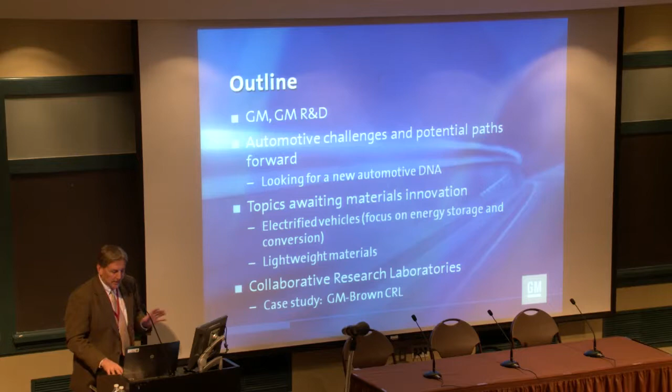In my own particular case, I've dealt a lot in my research with both lightweight materials and energy storage solutions. I'm going to focus on those for today, and I think those are actually critical growth areas for the automotive industry as well. I'd like to then close with the Brown General Motors Collaborative Research Laboratory.

Real quick with regard to General Motors, it goes back to the turn of the century. 2011 was about a 5% return on sales year for a $160 billion, $150 billion business, and it employs about 200,000 people.

The history of GM R&D - it's one of the first, actually, automotive research laboratories. It used to be more or less centralized in Michigan, and now it's very much a global network. You can see that here in terms of the overall makeup of our R&D network. And the Collaborative Research Laboratories is a big part of that.

One of the things I would tend to say is automotive is an extremely competitive business. In the best of times, the best companies are making about 5% return on sales, yet you're talking about structural costs and revenues that are well over 100 billion. So if there's a downturn in the economy, it gets tense. For that reason, it's been considered to be a very tough company to be in.

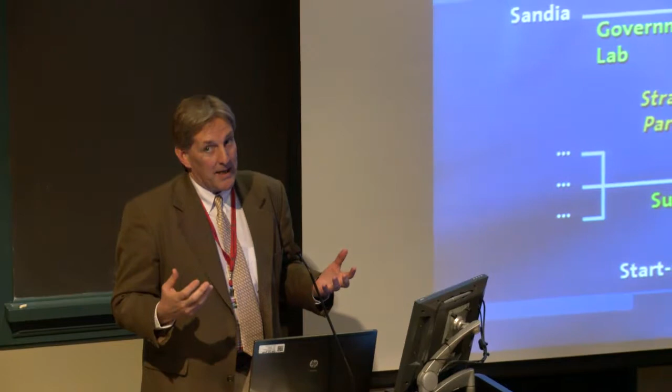One way I look at that, as far as how to get research done, is you have a bit of a junkyard dog mentality. You're willing to collaborate with anybody, and it's just a lot faster way to get work done and get research done. So at any rate, with that in mind, some of the brief history going back to the start of the vehicle.

The reason this slide is useful to me is, why do cars look like they do today? That is actually a profound question, because you'll see, if I get a chance to show the movie at the end, I'm not sure cars are going to look like that in the future. In some sense, you can trace it back to the horse and buggy. And the LaSalle coming out in about 1927 is often viewed as one of the first modern day vehicles.

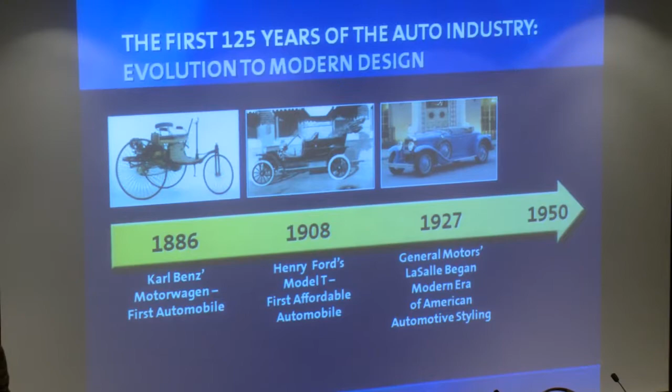So you want to buy a vehicle, typically if you're in the United States, you want one that has 4 to 5 passenger capability, and it has all the attributes you'd want out of a vehicle today. If you trace yourself back to the 1950s, you see that same basic attribute, and styling was king at that point in time. You had model years coming out that tended to rule the day, and the models were fairly differentiated. However, there were about 200,000 to 300,000 units per model, and that's important—I'll come back to that.

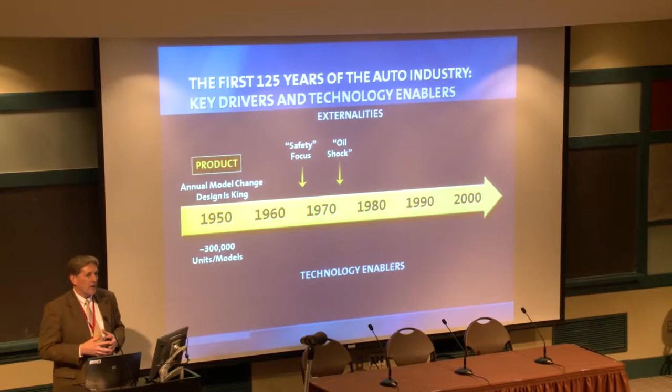So advancing from there, we had two relatively large shocks that changed the industry. One was a safety focus, which now manifests in airbags and extremely safe vehicles. Then there's the oil shock in the 1970s—a lot of folks here won't remember that. I can remember having to park our car at the gas station in line, walk down there, and your dad gave you about 25 cents to fill up the car for him, and he'd come pick it up later. But at any rate, the progress has been fairly profound since that time.

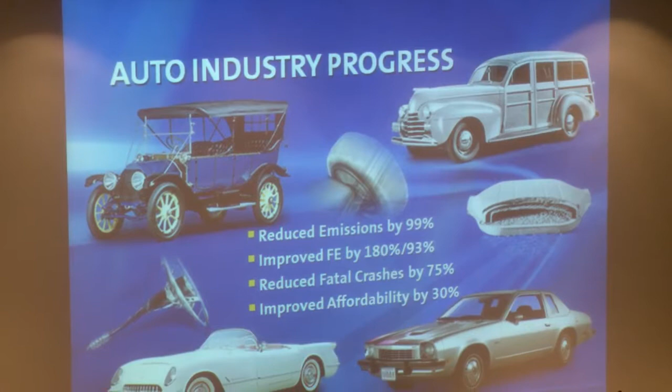There are greatly reduced emissions, and this is important—I'll touch on it here and probably won't mention it again—but there's this extended range electric vehicle concept. The Chevy Volt has that embodiment. One thing to keep in mind is that the emissions between cities, when you'd drive the internal combustion engine because you got about 40 miles of electric range in that vehicle, is pretty much negligible. It's hard to measure some of the regulated emissions at this point, which tends to set the regulations. So they're extremely clean, especially after they've gone through light-off and are driving on the highway.

One of the problems we had in the 1980s and 1990s is we got very good at making these 200,000 to 300,000 unit vehicles, but we badged them differently, and they all looked kind of the same. So you tended to get a more boring styling approach. Then coming up to the year 2000, there was a lot of emphasis on fuel efficiency and hybridization, which I'm going to talk about—electrification of the vehicle. The other thing that happened was this pervasive styling change. Now it's very common to have about 50,000 units per model. That places a great deal of emphasis on agility in manufacturing.

When you have forming processes, you want to be able to use the same die and presses—you can't replicate these things. A body shop costs about $1 billion in an automotive assembly plant, so you've got to be able to stamp all these different parts. You have to have quick change of tools, and you have to have very robust simulation codes so you know how to do stamping without problems related to agility and making different parts.

Now coming onto the next part of the talk, which I think is quite important, is some of the automotive needs. One of the most important things to keep in mind, because you're going to see it pervasive, is sustainability. That's probably going to be one of the biggest things we face. We don't really see it right now—you don't see it, you don't feel it—but it's probably going to be out there quite soon for us.

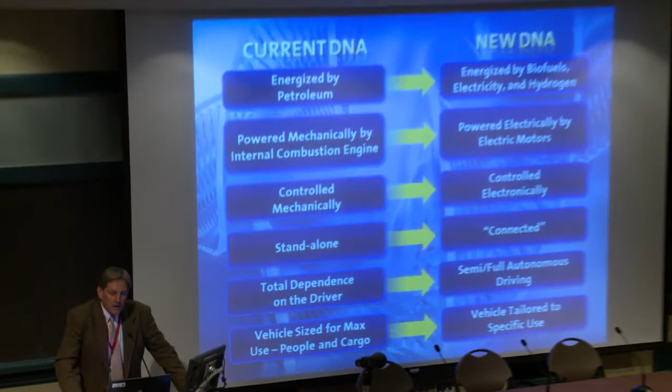So this is why I was going to this current DNA and new DNA in the talk. The current DNA, we're energized by petroleum. Likely that's going to have to change.

We've already had people—and I don't have enough time to show all the slides here—but people from oil companies, the first time about 5 years ago, said we're past the point where our known reserves can supply all of the known demands. So there's a gap at that point. People thought that tipping point would be a rather dramatic change for energy security. In some sense it is, but for the most part, people don't think about that every day.

But we're going to see much more reliance on alternative fuels in the future. In the past, we were powered mechanically. As you go to more electrified vehicles, you'll have other power sources come on and other couplings or transmissions—electric coupling, if you will.

The next thing is standalone. I'm going to show on the next slide connected vehicles, but one of the things we need to address, in particular congestion—which is a large problem with our emissions as well—is vehicles got to talk to each other. And the other thing, what's even harder, vehicles got to talk to the infrastructure.

The real question to ask is, will vehicles at one point in time be safer driven by just the vehicle than for the owner driving the vehicle? There was a DARPA Urban Challenge. GM entered that with Carnegie Mellon, and we had the winning vehicle—it was a Tahoe, and it looked like all kinds of claptrap around the vehicle with all kinds of sensors and LiDAR and everything else, but it could drive a course.

And the course was kind of funny. They had even changed the course from the original map, so the vehicle still had to drive it when a stop sign was one place and now is no longer there. And the vehicles can do that. We can do that today. They're incredibly expensive, and they're a bit slow, but nonetheless, you can actually drive autonomously today. That isn't a question.

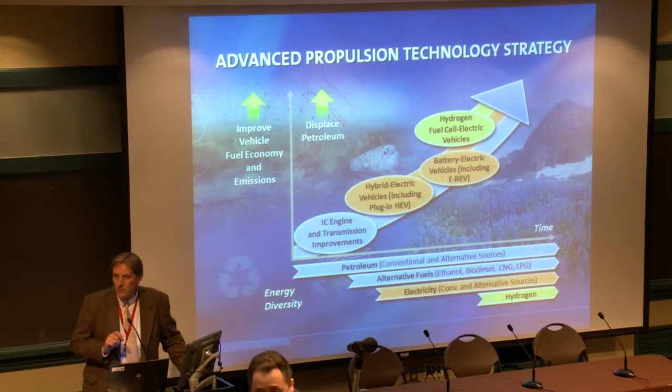At any rate, with regard to conventional vehicles today that you see on the road, we have two types available, and I'll make a brief comparison of the two right now that might be solutions to our immediate future energy challenges. The Volt is one of them, well known by most. The general architecture of the vehicle is shown here.

It has this attribute of having about 35 miles in cold weather, about 45 in hot weather as far as miles you can drive electrically. No matter what you do during that time, it will drive electrically, even if you put your accelerator pedal to the floor. That differentiates it from a plug-in hybrid, which is not a full-function EV before it drives out its battery pack state of charge. Once you drive off that 35 to 40 miles, the vehicle will act like a charge-sustaining hybrid, much like a conventional hybrid.

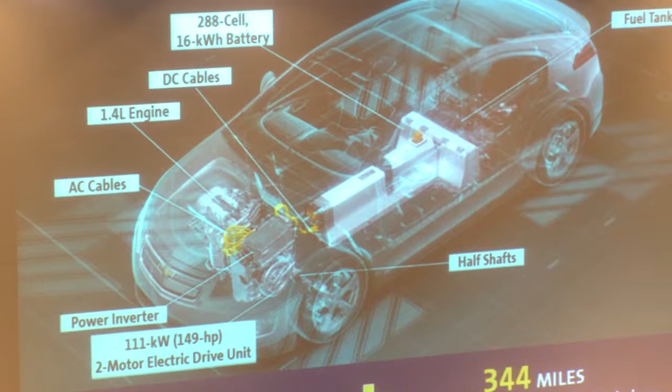It has still a fairly large battery because a lot of reserve is left, about 25% of the pack capacity. It's a 16 kilowatt-hour pack, and so the combined range is somewhere near 400 miles, depending on how it's actually driven.

So we've announced, and I don't know, let's see if Tony's still here. Tony, I actually put A123 on my slide. You didn't put GM on your slide. It was one of the collaborators.

But anyway, we've announced that A123 will be supplying the battery pack for our small battery electric vehicle that's coming out, shown here. It's off of our Chevy Spark platform, much like the Chevy Volt is off of the Chevy Cruze platform. Some different electrode materials are shown here, and I won't dwell on this more other than to say there's a lot of work to be done in that area to reduce cost and improve performance of electrode materials.

So now, if the batteries don't go far enough in terms of reducing cost, particularly for a pure electric vehicle, where batteries are very expensive, the question arises: will fuel cell costs come down? Because at the end of the day, what's really important to consider is that the only vehicle that can provide zero emissions off the vehicle, not off the grid—you can have some emissions where you generate your energy, but on the vehicle, 350 miles of range, and approximately a 3-minute fueling time, much like we have today. There's only one vehicle type that we know that can do that, and that's a fuel cell.

Of course, the problem is fuel cells are extremely expensive. So cost reduction and infrastructure deployment, which will likely follow the cost reduction, would be the two most pressing concerns there. Some of the remaining challenges are shown here.

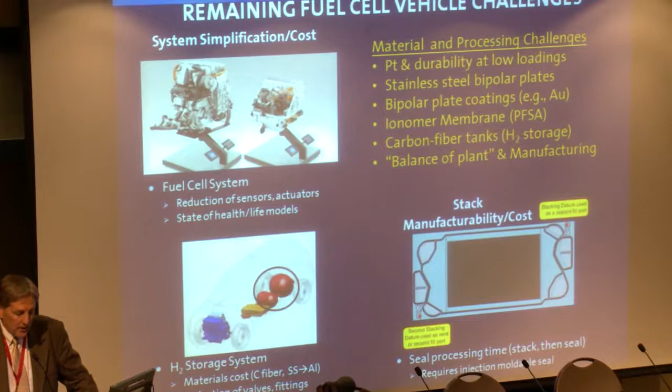Actually, the balance of plant is very expensive in a fuel cell. You've got a lot of things running, pumps and everything else that make the critter go. The hydrogen storage system, people often forget, is very expensive. We did a fair amount of work ourselves on solid-state hydrogen storage, and there's a lot of interesting material science there, but it just looks extremely difficult to ever store as much hydrogen in a solid-state material as you can get by very, very high pressure carbon fiber tanks, and that's really what's used today, but they're very expensive. Carbon fiber isn't used pervasively as a structural material because it is so expensive, so you're more or less pushing that expense back onto the fuel tank in that particular case.

There's an analogous problem with natural gas tanks as well. And then last, some of the other things you might not think about: it turns out bipolar plates are very expensive. They're made out of stainless steel. You can kind of think of a John DeLorean fuel cell engine—it's a whole lot of stainless steel that goes in there. People are looking at ferritic, low-cost stainless steels for that purpose.

But the corrosion environment is very tough. You've got hot oxygen, it's moist, and it's on the oxygen cathode, and that's a very corrosive environment. And then some of the things like seal processing and welding—actually, the longest line length of welding that GM has probably ever done would be in the fuel cell bipolar plate joining.

So these are enormous challenges to get the stack-up fit and architecture correct for eventual widespread application.

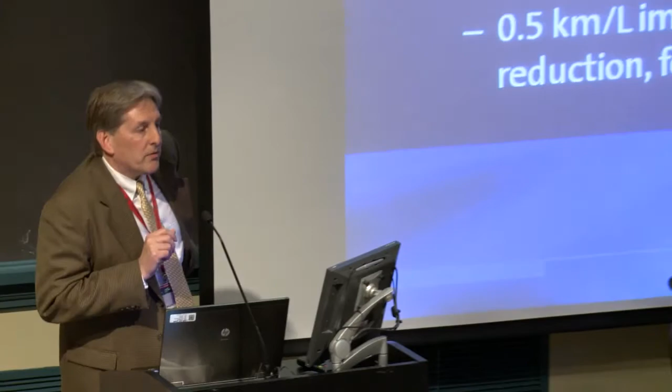The next thing I'd like to talk about briefly is vehicle light weighting. You get about a 6% improvement in fuel economy for every 10% decrease in mass. Some of the other ways you can look at this are listed there, but it's a significant lever to pull in terms of trying to reduce fuel consumption.

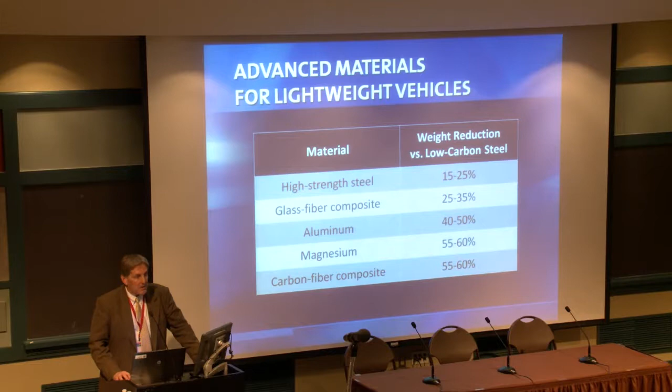If you look at this table, you can see some of the materials and the approximate reduction you can have relative to low carbon steel. These are somewhat usage dependent—are you talking extrusions or castings or what have you? But the approximation is shown there, and the basic point is most of our car today is made out of low carbon steel, and there's an opportunity to reduce mass. The obvious problem is that these materials tend to cost more. They're typically looked at as high value materials in automotive.

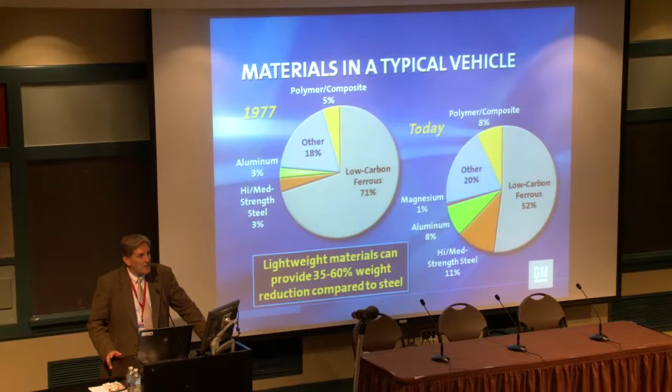If you look at material trends over the past 20 to 30 years, you can see that we had a lot more low carbon steels in the past, and now we're moving more into polymer composites, about nearly 10% of the vehicle. It's mostly thermoplastic olefins and other plastics used as closeouts and fascias. Aluminum is about 10% on a vehicle as well, primarily in the cast engines.

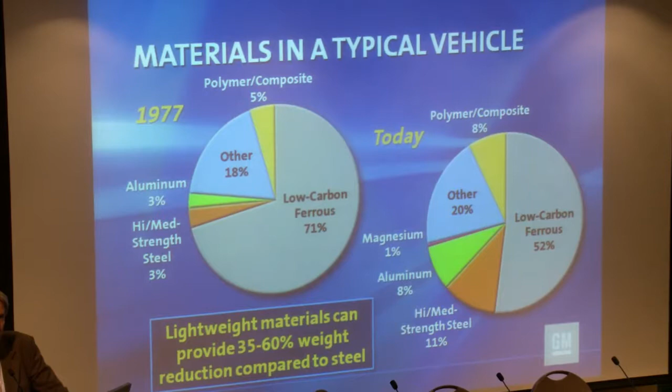Nowadays, because of the way vehicle architectures are set up, you have most of your mass over the front where the engine is, so you want to lightweight there, otherwise you have a front-heavy vehicle. So you pay a premium to lightweight up near the front. Likewise, you try to lightweight at the top of the vehicle and your unsprung mass. But aluminum has made it in there for the cast engine parts in particular—you see very few new engines coming out that aren't cast in aluminum. The question will be, can magnesium be made strong enough in terms of creep strength and corrosion resistance to replace aluminum in the future?

The Corvette is sort of a poster child in our case for lightweighting, for a different reason than fuel economy—it has to do with about 3.5 seconds for 0 to 60. For rotating parts, titanium is often used so as not to limit horsepower on those systems. Magnesium is near the top of the vehicle for the magnesium roof shown there. And then there's a carbon fiber floor pan—actually, there's a balsa floor pan that we have in other systems as well.

The Corvette's structure is actually unique to the industry. It has these frame rails that run from front to back, and they're pinned by the bumpers—it's the only vehicle designed like that. Through the center section is a stamped aluminum part that binds the two frame rails together. So the longest frame rails in the industry are actually on the Corvette, the longest hydroformed frame rails. There's a project we've done through USAMP.

One of the things we've come to realize is that nature has given us a whole bunch of materials, so you want to put the right material at the right place. You can think of not just topology optimization for load paths, which we've all done for many years and is still a very complicated subject, but also materials optimization at the same time. Ideally, you want to couple materials optimization and topology optimization.

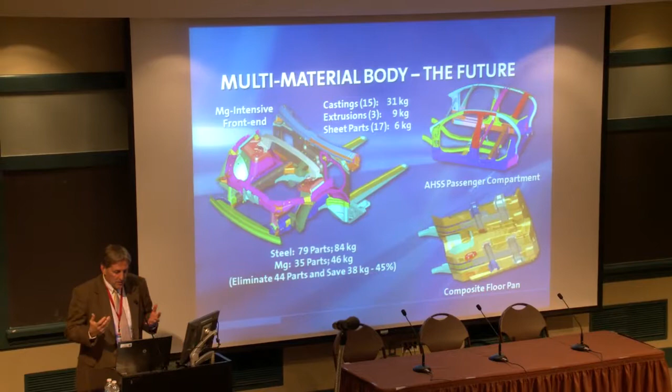So here you can see an advanced high-strength steel passenger compartment that tends to protect the passenger. Then you have front A-pillar forward, so that front engine compartment region is dominantly magnesium. And the floor pan, because of its large flat surface and fairly massive nature, is a composite floor pan, which tends to make for a more optimized vehicle system.

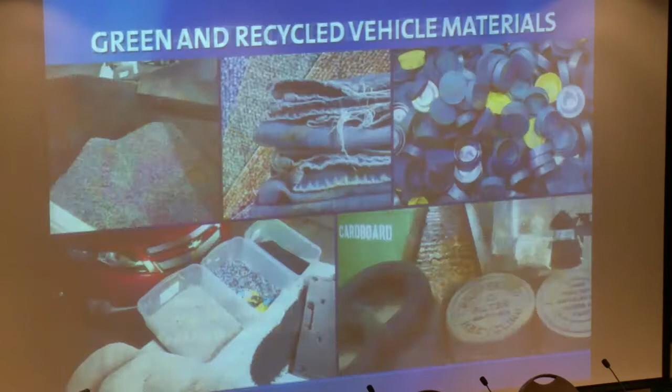I won't say more about it other than to say recycling is a big part of the automotive industry today. It has been in the past, but it gets a whole lot of attention now, as it should. So we strive very much to have recyclable parts in all systems.

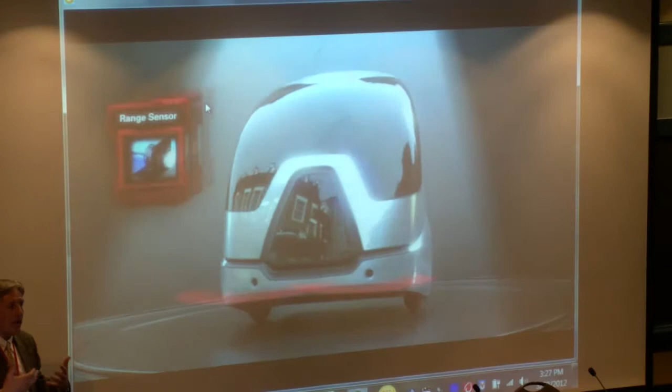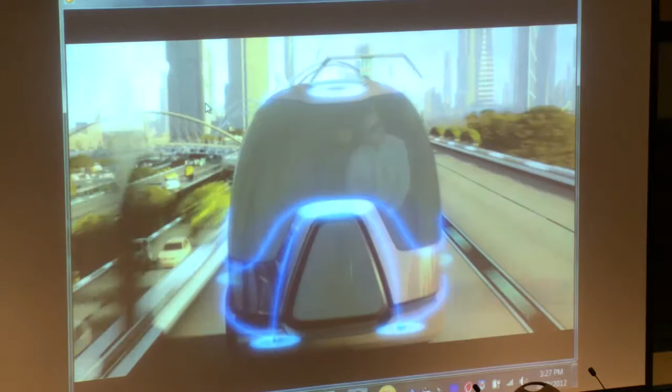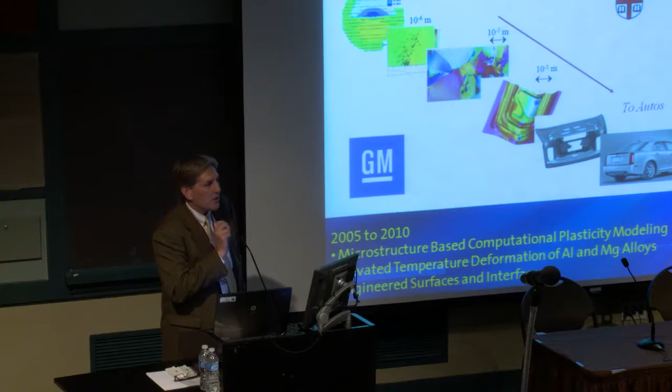We have a saying we often use: atoms to autos. The basic notion is to go from calculations that are rather basic in nature—from say density functional theory to atomistics—and then work your way up through maybe single crystal plasticity, finite element calculations, and into vehicle parts. We have a couple examples I'm not going to talk about precisely today, but we've actually done that exchange of length scales.

Now, I don't mean to say that the code we run in automotive for design—that's LS-Dyna in GM's case, others use ABAQUS or other finite element solvers—we don't put atomistics into those codes. But we can inform our constitutive relations used in those codes by what we learn from some of these smaller length scale endeavors. That's where the linkage comes in, and it becomes very concrete in many examples.

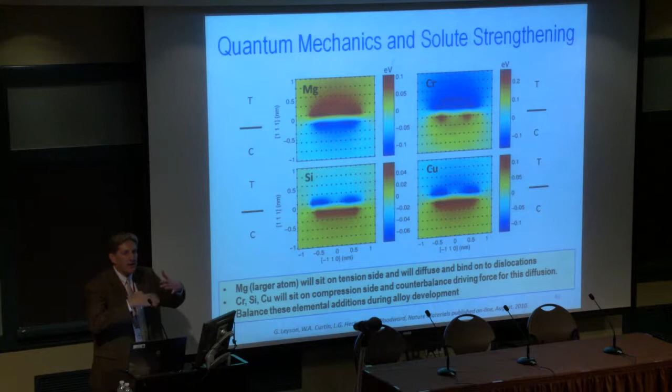The posters out there did a real nice job, so I'm only going to show very quickly three things. In this case, we're looking at solute strengthening, and it's interesting where the solutes end up. Actually, if you have an interface between the tension and compression side, they don't always end up on the same side, and it has to do with size effects as well as electronic effects in these systems.

Then coming up from things like electron structure calculations in the past to here, the influence of grains and crystal structure becomes important, especially for single grain plasticity. And as we move up in length scales, we actually get into treating stress-strain relationships, and these can feed into our vehicle simulation models.

There are some examples here of electron backscatter diffraction experiments, and we have a nice setup that we've used—actually learned a lot from Clyde at Brown in this area on how to do in situ electron backscatter diffraction under tension and compression, and then be able to track it, and inform our models with that kind of information.

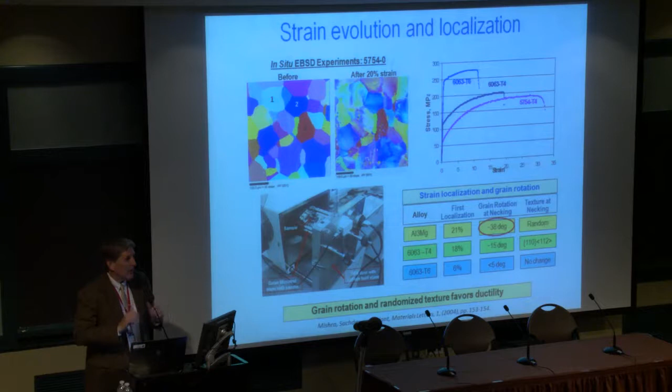The CRL structure for our next 5 years, what we're working on right now for the past year, we've split this out.

We realized that with all this emphasis on energy storage in automotive, and especially as we go to these higher energy density materials, they tend to expand and contract quite a bit. The conventional materials used in batteries today expand between 5 and 10% each on the electrodes. As we go forward to silicon-enhanced negative electrodes, and maybe even sulfur or other positive electrodes, now we're talking about expansions in the order of 100%.

So you have to do 2 things at that point in time. You've got to get the particles extremely small so that surface effects become important and tend to hold the material together. And you've got to terminate the electrode with a chemically stable layer, say a carbonaceous layer, that doesn't have chemical degradation reactions with the electrolyte.

And these are the kind of things we're trying to get a handle on computationally. We're also at the same time doing some experiments. Primarily the experiments are done, actually at Brown and at GM in this particular case.

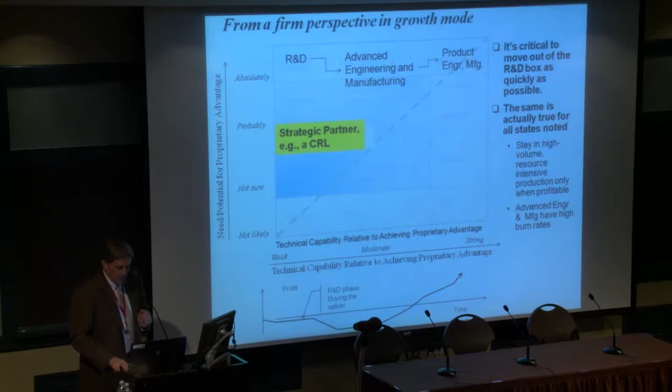So maybe just a helpful concept. This is sort of a Boston Consulting view of how to look at collaboration, but the basic notion, some things are kind of obvious. You just never want to end up down in the lower right, so that's not a good thing to talk to management about. And you want your silver bullets, if you will, to be things that are absolutely important and that you don't have strength in, but you don't need much strength to actually grow.

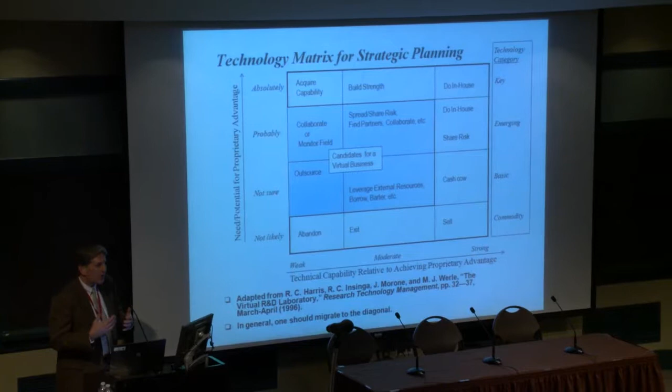So the candidates for a virtual business are sort of in this central region where you're not really sure where things are going, and yet at the same time you feel like you need to be a player there, and you can basically buy down your risk and expand your resources if you then create a collaborative research laboratory.

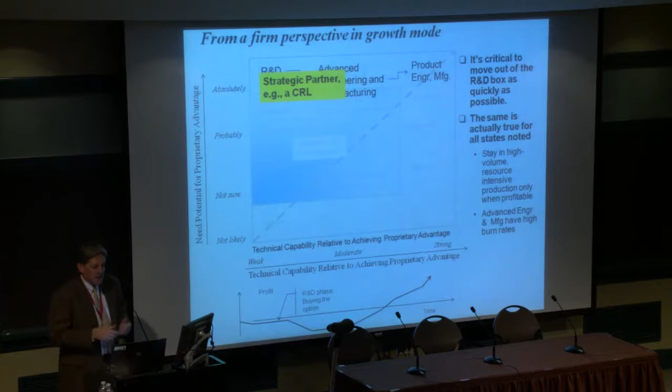And that's what we've done. So now as far as the animation goes, it shows the notion that over time when things go well, it's hard to tell who's the researcher from GM and who's doing the contributions from the PhD students as well as the professors. It tends to be one entity at that point in time, and it's most successful at that point in time.

So in my view, what really makes a CRL, Collaborative Research Laboratory, successful, elements of collaboration are, I think, pretty obvious, but they're nonetheless helpful to state and be concrete about. Trust is obviously a really big issue. We do tend to share a lot of information, and trust comes with that, and you build that up over time. Those are about relationships.

Problem selection typically comes from industry, at least for the grand problem, and then parsing it further to find out, well, what are the really big rocks in the road to actually solve that grander problem? That's done jointly, and oftentimes the professors will be best at clarifying those things.

Need a champion on both sides. Alan and I are sort of the co-directors of the CRL, and so we're the champions in that respect and have worked hard to keep this thing going well. And then, great people - obviously, that makes great projects and great work go.

Then the second thing is recognize the value of accomplishments. I put them here for the last phase of our CRL, that is 2005 to 2010 timeframe. And I picked out 3 figures, but we had about 62 publications. These internal reports are listed that then tie back into actually GM internal initiatives. And they're broken down into different categories.

That was mostly associated with lightweight materials. We started a little bit on batteries toward the very end of that phase. Presentations mostly invited, about 41, and there are other key metrics that are important. I'm not going to put them down here, but graduation of students and thesis written and things like that.

But those are things that are important because it turns out when things go well, at the end of the day, you typically have things you can count, and it's important to recognize those because it adds to the goal congruence for a collaborative research laboratory. So some closing thoughts then on the Materials Genome Initiative.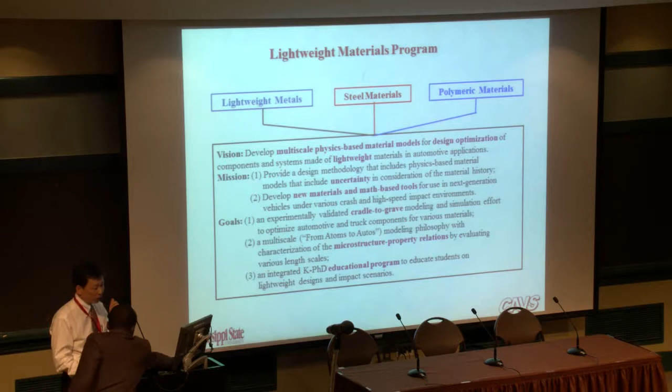A lot of previous talks mentioned these things. We group them here: one is lightweight materials, mainly aluminum and magnesium type. We especially work with USAMP and Mark from GM. So magnesium becomes a priority in this area.

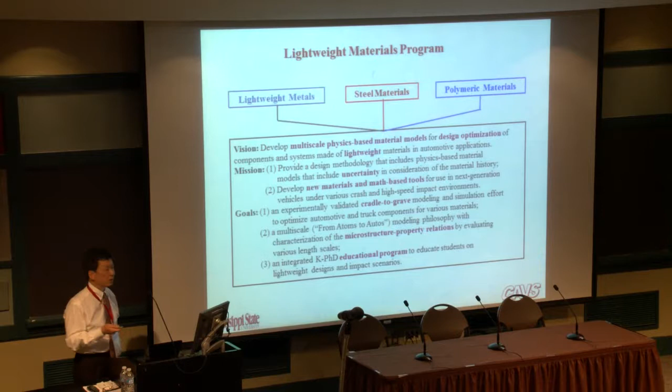We also work on steel metals and steel alloys, with material suppliers or steel-making plants like Severstal and Nucor down there, so we have research going on there. The polymer materials are broad enough to cover synthetic and organic types.

For synthetic, we have typical composite and polymeric materials. For the organic side, we also work on tissues, bio, and bio-inspired type areas.

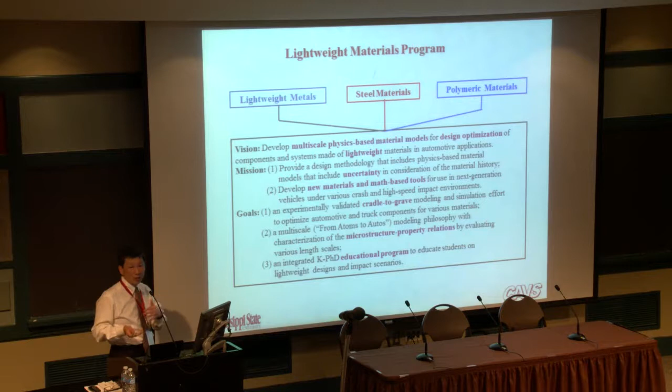Basically, it's a physics-based material model addressing the material, so the discipline really combines mechanics and materials. Material science and mechanics work together, emphasizing lightweight design, and eventually developing new material and math-based tools.

Cradle to grave is the approach we are trying to address. We have this kind of system thinking, giving students and researchers the process impact, the property, and the structures—that's the relationship.

We also have an education program where we take the outcome of the research down into K-12, and up through the master's and PhD programs.

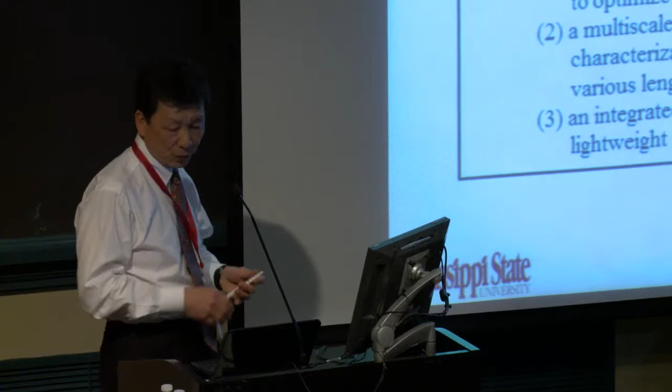Our approach looks into the history effect, especially the process-structure-property relationship. There's also cyber infrastructure at the university level, working with DOE and other national laboratories, so we can contain material databases for the three material branches we talked about.

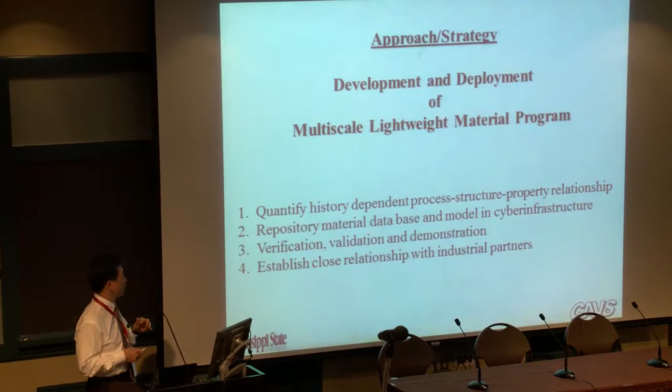We don't ignore experiments—we think it's very important to do them. But we don't want to compete with large corporations, so we work at very small scales, sometimes small enough to go from coupon level down to the SEM and TEM level.

Demonstration certainly will work with sponsorship to see how that can be correlated, and that's where partners become very important to us. So this is the way we use the cradle-to-grave approach.

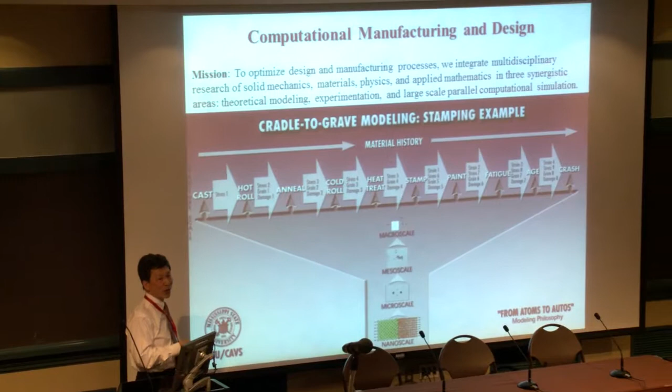This is the one I work with, Mark Horstemeyer. We use aluminum as an example to address how important material history is, because an old car or new car performs differently at the end of the day due to aging effects. Multi-scale and hierarchical impacts at different conditions provide different information at different levels.

That's what we call computational manufacturing design. This is a typical multi-scale material model showing the bridging effect. Electronically, you have interfacial energy and cohesive energy and how that comes along, then you get into the atomistic level, where you look at mobility, dislocation, and so on for crystal plasticity—this is typical for metal forming, where we're doing this.

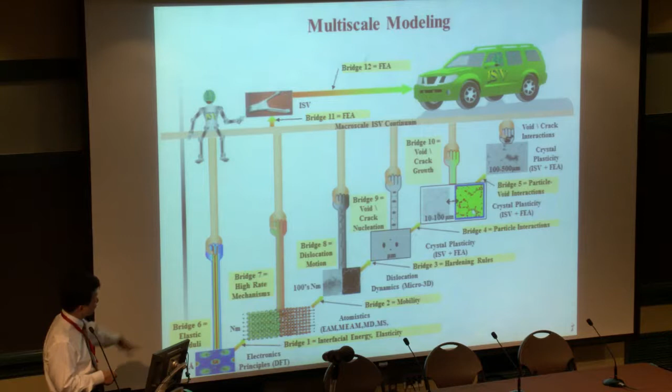For polymers, you go into the molecule chain, way down there and way up there, and we've had some little success. MIT has quite a bit of work going on there as well.

The cyber infrastructure is very interesting because five years ago, if researchers left the site, we couldn't retain that information. But with this cyber infrastructure, we can at least retain what the material data is and what models have already been developed, and put it right in there. There's a quality check and accountability for each group that contributes to this cyber structure, and eventually these engineering tools may enable on-site web computing, which is the dream.

And here, just to give you a magnesium overview.

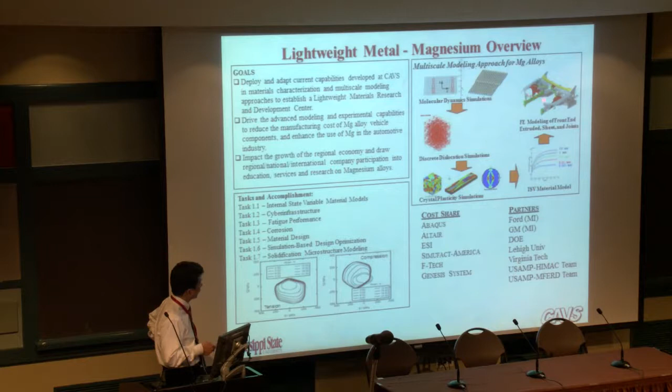We work with GM and Ford people, looking at front end situations, how we address the sheet, extruded, and cast parts. Can we use ICME techniques to address the structural part?

When you go backward, you can get into molecular dynamics and crystal plasticity, all the way to the stress strain curve to analyze these structures. So there's a number of tasks we have, starting from high level down to solidification and simulation-based design optimization.

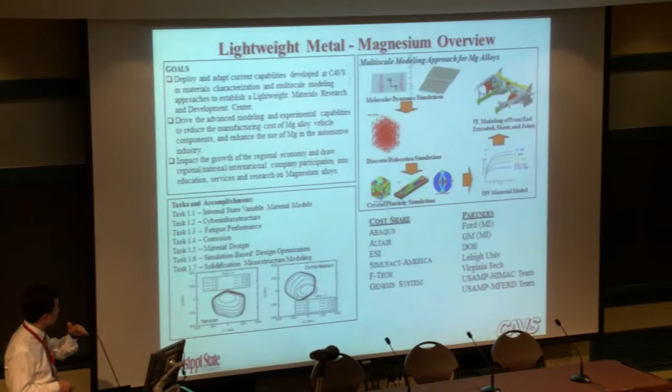This is a typical yield surface of magnesium, which incorporates twinning, and how the mathematical tool can be developed with it. We do have sponsorship for this kind of work. Again, this is still a program.

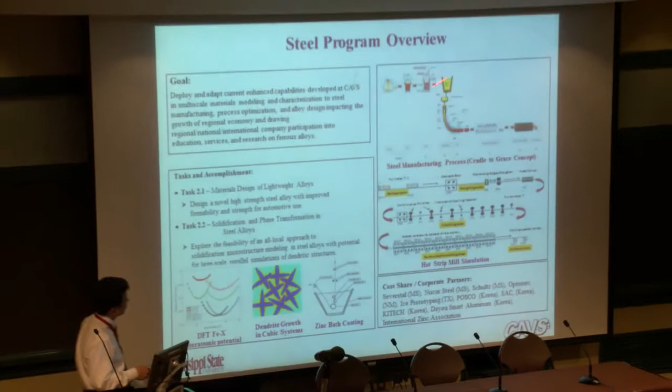The interesting part is in our backyard we have a twin roll caster with a sheet product, only 10 minutes driving away. They've been working with us for the past 2 or 3 years. We try to understand what they're doing, and they try to show us what their needs are, for example a dual-phase alloy in a higher grade, and a TRIP alloy and its application.

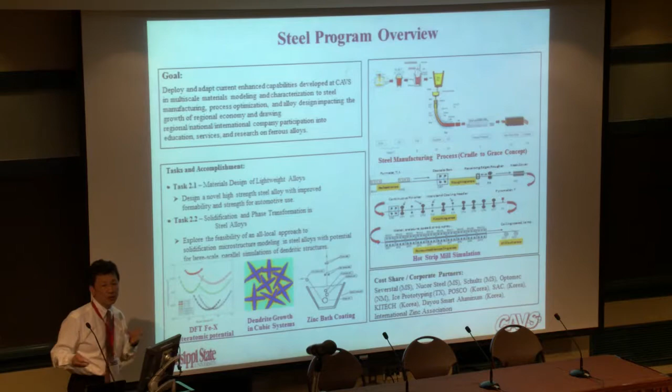So we start getting not only into steel manufacturing, but also looking at the process, what kind of software code, and how our multi-scale approach can help enlarge that existing software, which we call metallurgical code, and enhance it with detailed information and modeling. So that's the steel program.

And then the polymer program—we have certain internal state variable models, but also we get into the molecular area, trying to assemble a large number of molecules and look at stress strain curves and damage. This eventually connects the bridges toward doing the design.

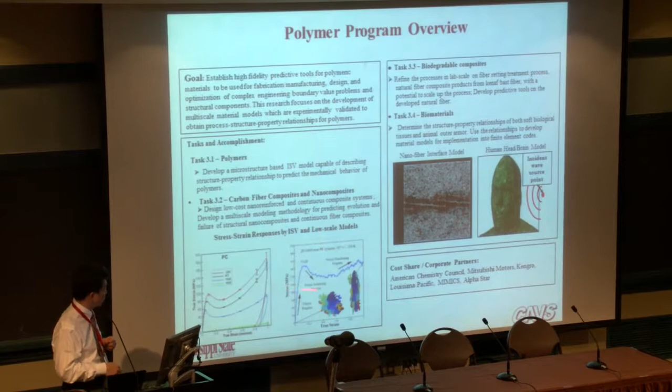For some composites, at the interfaces, you can numerically address the interfacial strength between the matrix and the fibers. On the other side, biomaterials work is looking at high rate impact and explosive effects on brain injury or lower limbs. So that became another branch of the research.

We also look into bio-inspired areas, designing football helmets to get the best protection and safety, and so on. Those are the three branches of materials we're working on.

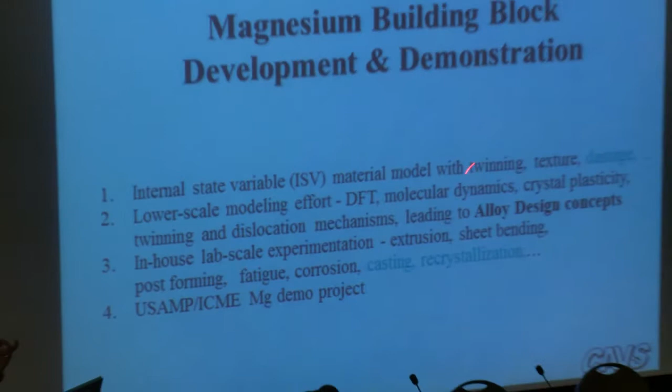Now in the magnesium building block, I want to give an example of the ICME type approach. The top level is an internal state variable model which carries some history, but because twinning is involved in this alloy—unlike aluminum with its 5-slip system—there's additional twinning going on.

So we're working on this very diligently, along with the textures. The blue or green color represents the new work we're doing. The lower scales also work not only on parts, extrusion, and sheet forming, but also through dislocation and molecular dynamics areas.

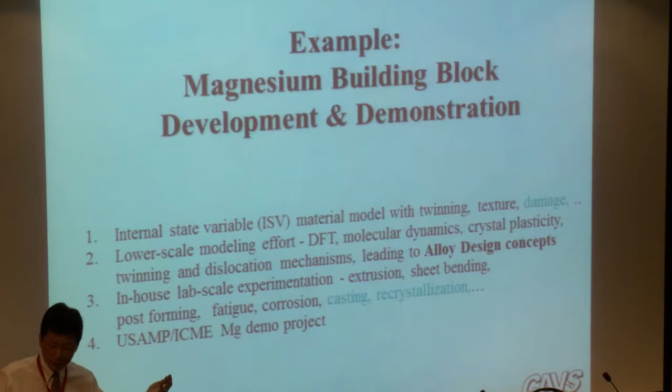In the lab experiments, that's a very critical part, in the sense that we want to be self-sufficient—we can't rely on suppliers doing certain experiments for us. So we develop a series of different in-house lab scale experiments for each part of it.

We move on to the casting and recrystallization area ourselves, and finally we have this demonstration through the Mag Demo parts project we work with.

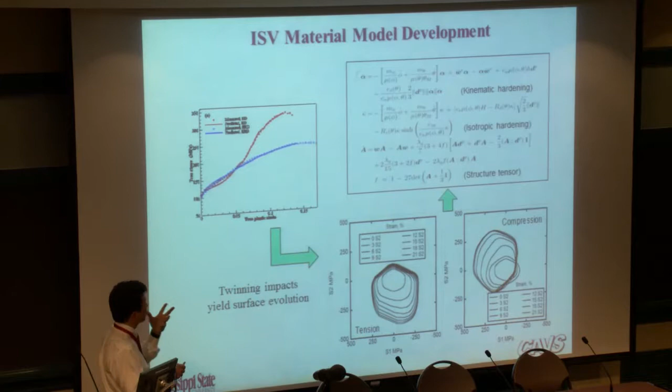This is a typical example showing that in magnesium, at certain temperatures and strain rates, twinning occurs, which exhausts in a way that leads to fracture and so on. Then you have the normal stress strain curve. So we use crystal plasticity to create a yield surface, which integrates more easily with the numerical code for the finite element approach.

Meanwhile, physicists look from the dislocation point of view at magnesium and its interaction with different elements, and see how the stacking fault energy impacts the slip system.

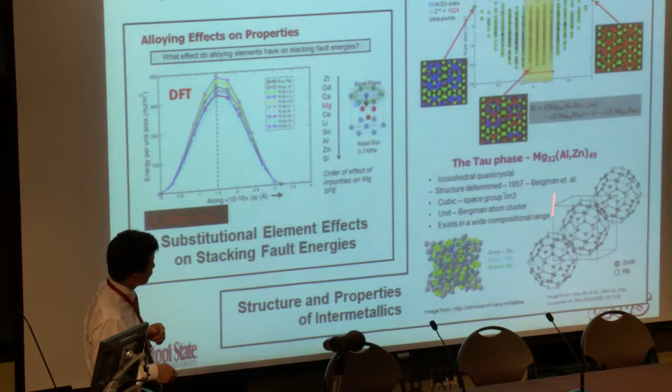We also worked with Northwestern's Greg Olson, whose experiments couldn't identify aluminum and zinc positions. So we used DFT to run about 10 different positions across roughly 1,000 numerical simulations to find the most favorable and stable energy location, and the configuration of the two different phases. This feeds into the design as well as the thermodynamic phase diagram information.

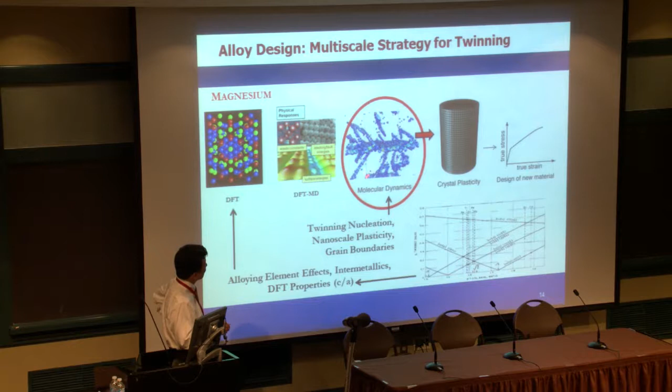Our optimal goal is looking from this area into the DFT and molecular dynamics, and looking into the grain boundaries, and eventually crystal plasticity and stress strain curves.

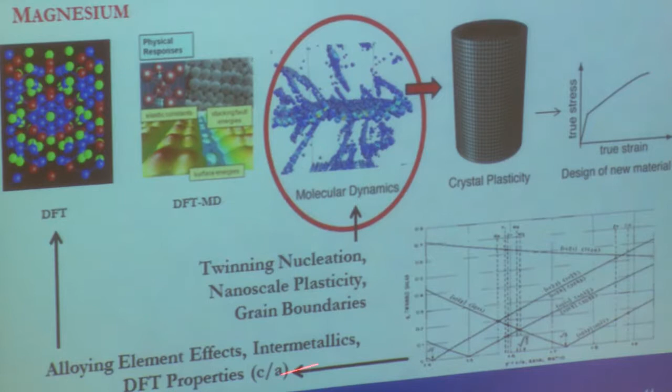We've had some success with pure aluminum and also some success with pure magnesium. The rest of it is working on the intermetallic and soluble phases and seeing whether these can come out easily. Also, in the design, there are 4 dominant twinning systems. We look at different designs, the C/A ratios, and see how we can design for better ductility.

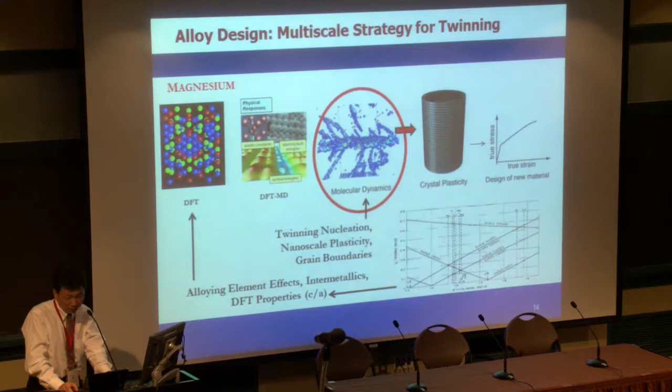Magnesium with no rare earth type elements. Rare earths have been very popular, people using materials like cerium and others.

This is experiments, which I won't show you. The other side is characterization techniques.

This basically shows we can cast small pieces, quickly do some deformations, and check the grain structures. We can check the extrusion, and then the fatigue and other things going on at very small scales.

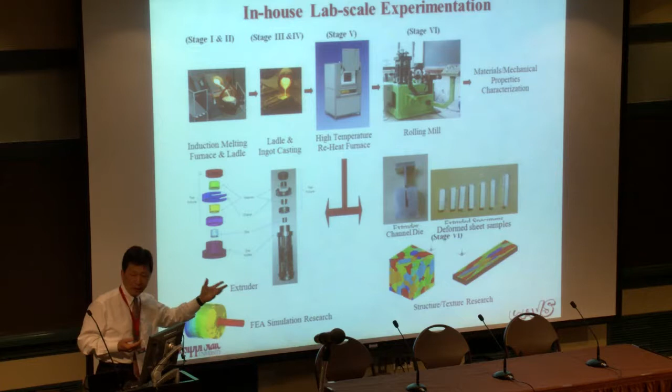Based on this, if you do alloy design, you can test these things right in our laboratories, and verify the result before scaling it up to answer any larger questions the sponsor wants to know.

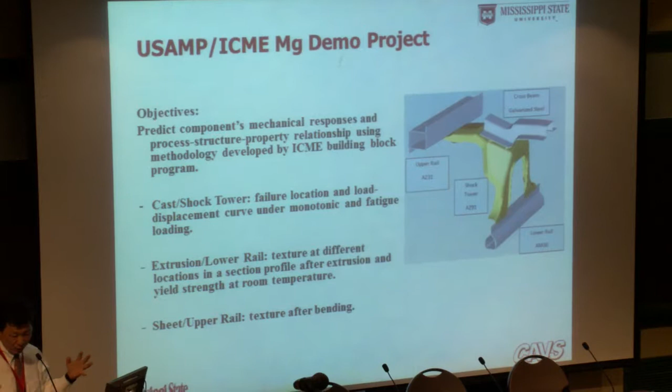For example, this magnesium front-end project, we want to predict the mechanical responses at certain conditions. There's a cast shock tower, extrusion lower rails, sheet rails, all combined together. The question is: can we predict each component's mechanical response based on the processing history?

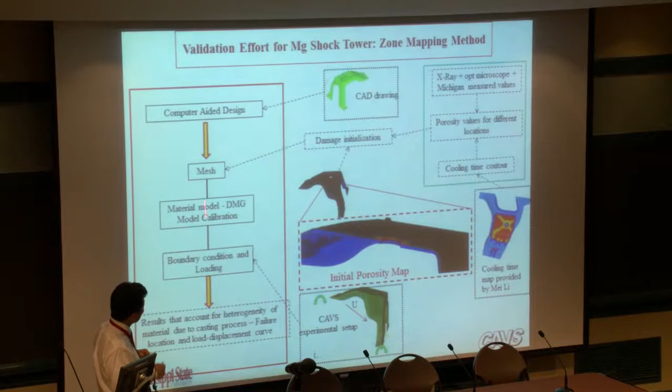Can we put this together with joints, and how does that response behave under monotonic and fatigue loading? This is the one we finished phase 1 with USAMP. We use the cooling rate to indicate porosity, which is heterogeneously distributed over different parts, then look at certain boundary conditions and see how the response is in the laboratory.

It turns out that with mechanical analysis, you may find out this is the weak area. We use X-ray tomography.

We can scan the whole thing, look at porosity, and identify the weak point. Once you get boundary conditions and analyze it, the weak point is verified in the laboratory to actually be the case. So that's kind of encouraging.

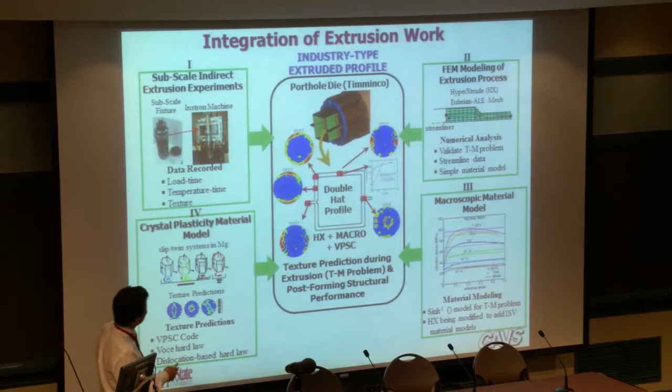For extrusion, I just want to quickly show you what we're doing here. You have this very complicated thin wall double hat type structure, and we want to predict the textures at different locations and relate them to yield strength.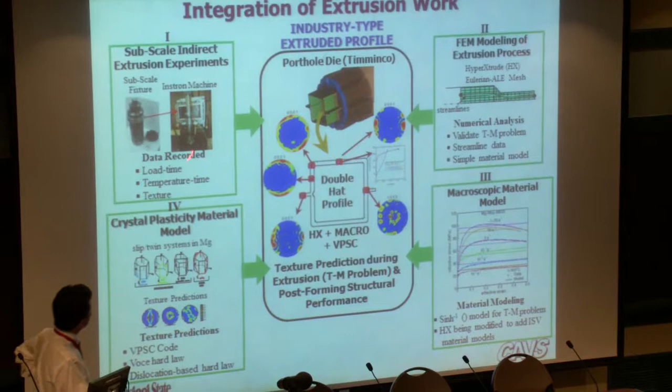So what we do is, in the laboratory, we need to be credible in predicting a scaled extrusion. We designed a laboratory setup maybe 1/10 smaller than the real one, very small, but it still has gradient structures.

We use crystal plasticity, including twinning, look at numerical streamlines, and include the high temperature stress strain curve. Then we can predict information not only about the texture but also the post-forming yield strength.

That's the challenge. That's the goal the sponsor set for us, and we go for it.

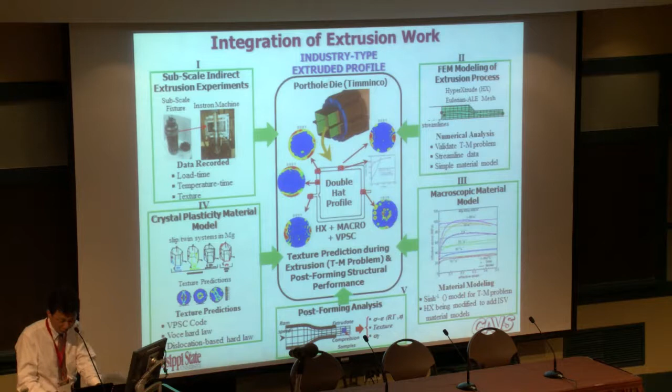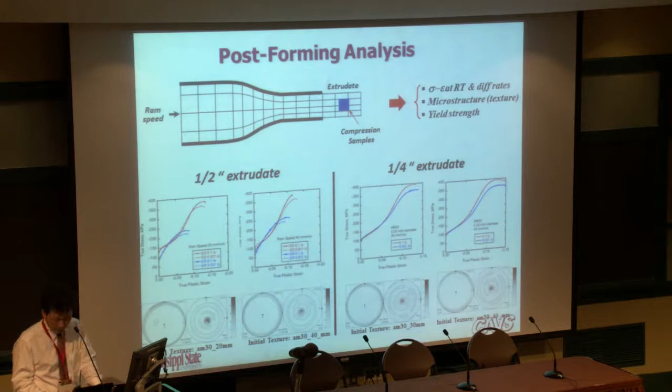This shows that even in the laboratory, without directly answering their question, we do our own extrusion and look at the twinning and monotonic twinning at different extrusion ratios, showing that the model can capture these things before we go ahead and describe that thin wall double hat type configuration.

Again, in the laboratory, we do very simple sheet forming bending, tracing this local area similar to extrusion, and look at the tension here, showing some sort of twinning. So we trace the streamline of the deformation path and see if our model can describe such things.

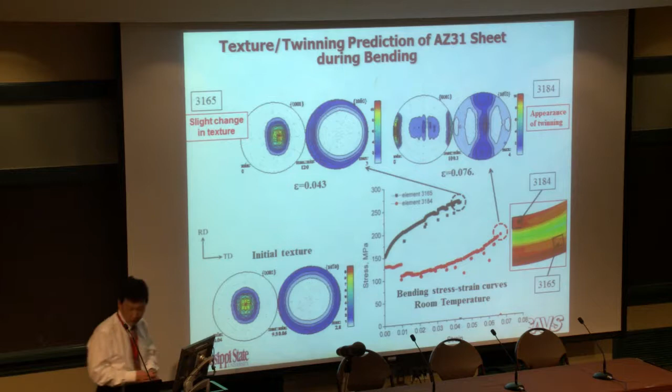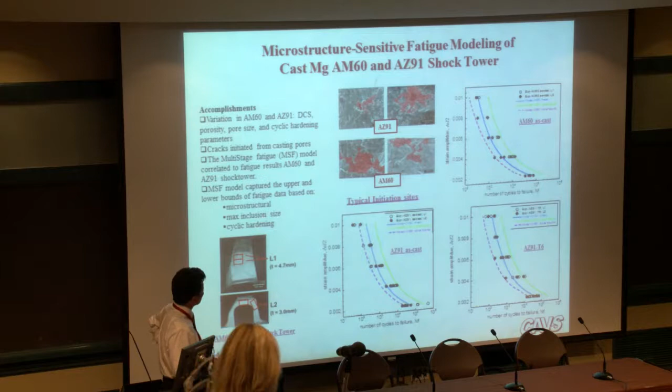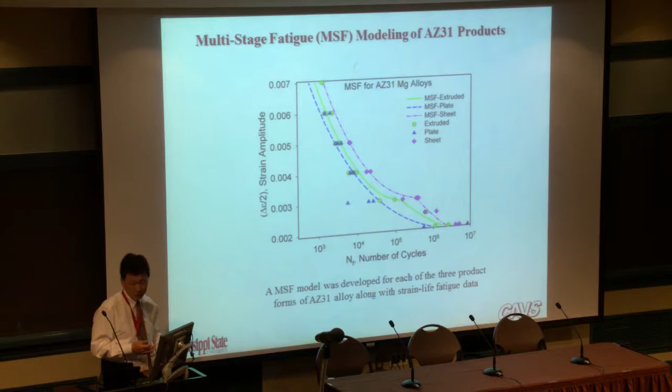So we have to answer those kinds of questions in the laboratory before we really apply to the physical part that USAMP's asking for. This also shows the fatigue responses of different cast structures. The learning here is we use one model and we're able to produce 3 different products based on microstructure: plate product, sheet product, and extrude product. Without working with the sponsors, you wouldn't be able to have this kind of data to test your model.

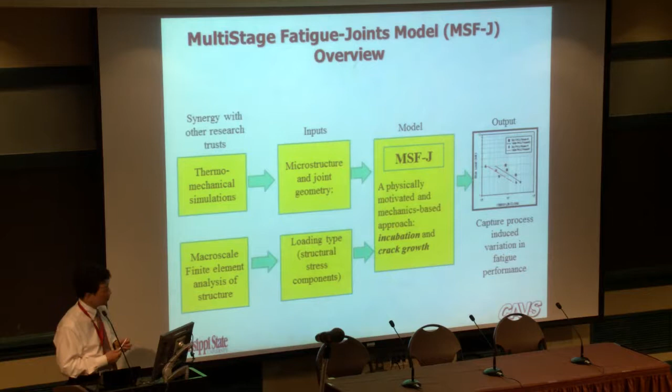And finally, there's a joint. The joint is very interesting because there are several different types of joints. We worked on friction spot welding first, and then tried to go back through their histories to look at how we can model this joint together, which is a big area for future research. Even armies are asking for this kind of information.

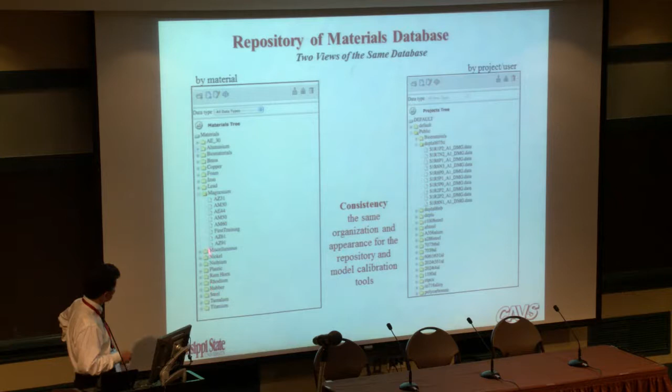This covers different material families, from biomaterial to magnesium to steel alloy, the ones we can get hands on. Certainly I welcome Brown to be part of this shared data—we can share together on this material database, and also different projects.

So finally, I just want to say the relevancy to MGI here, as several talked before, and now I'm showing this. It's first principle potential calculation that can relate to material attributes, and you have to be selective to pick up the right information. Right now we're working on ductility and creep resistance by alloy design based on first principles and other assistance.

It has to have a design concept, which may not be created by first principle, but we have to do such a thing. And then multi-scale experimentation is very important because that would be able to quantify some sort of structure-process relationship, and then you can do the validation with it in the laboratory before you claim that you can do the process prediction or product prediction.

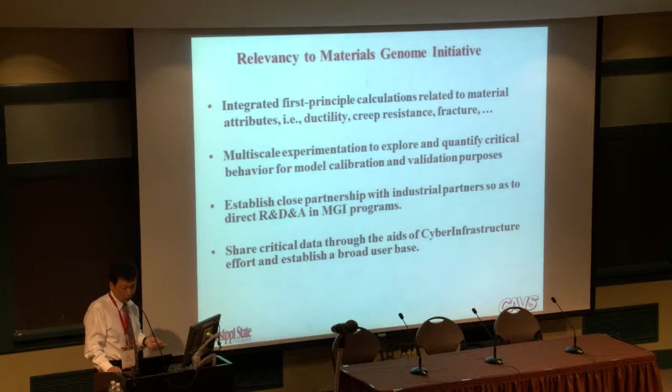We have to have a very close partnership with industrial partners. Otherwise, this MGI program—I don't know how we're going, because the community will be very small, just an academia effort. Sharing critical data by means of cyber infrastructure could be a good way to do it. We believe that's the way we want to do it, share with the communities, and then we can all together establish a very broad user base community. That's it. Thank you.

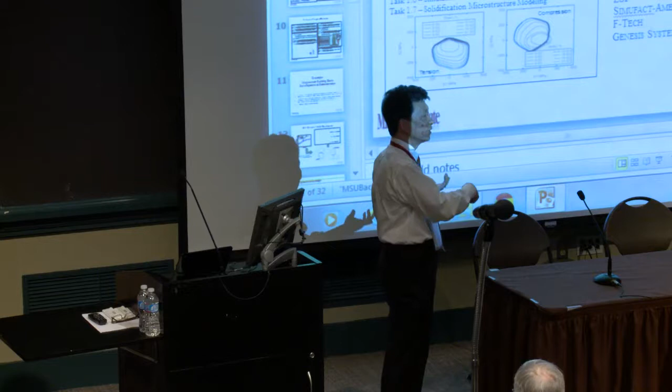But then we found out it becomes very diffusive in the texture when you do the large extrusion, because we have dynamic recrystallization. So now we have to look at the crystal code, see if we can introduce dynamic recrystallization behavior into it, and how that information can feed into the ISV model. Those are in progress, and we can talk about details afterwards.

It just seems like when you're doing FCC, it's a different story. Oh yeah, when you're doing HCP, with multiple critical resolved shear stress values. Yeah, it seems like there are some critical experiments along the way.

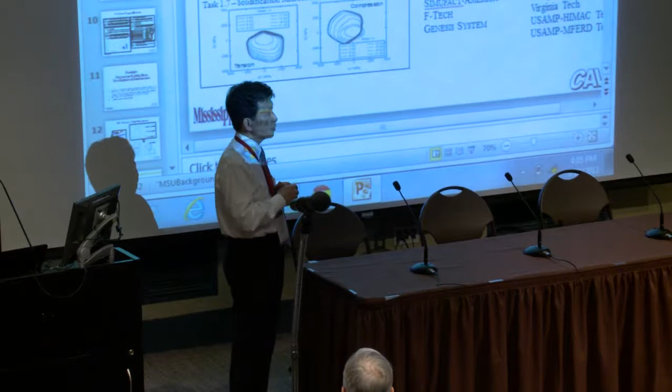Yes, we're doing experiments. So even at the macroscopic level, you can see the twinning stress-strain curve, and they're different. You have the basal plane and other planes, your slip systems there. We already implemented that information into the model, but it's still not good enough.

So we continue to improve that, and we have a few papers we can share with you. But that area, we welcome a lot of people to get active again on that, it will be very, very beneficial to magnesium.

And I believe in the next 2 or 3 years we can answer ductility questions. Great, that's what our goal is. Because the computational and experimental tools are about ready.

But we also know the gap, so we focus on the gap, which is the active twinning mode, and what is the resolved shear stress. We quantify it numerically, get this in, and how about enabling recrystallization at the initial processing condition that impacts the product information. So this will come together, and I expect in 2 to 3 years we can answer not only that, but also the data issue.